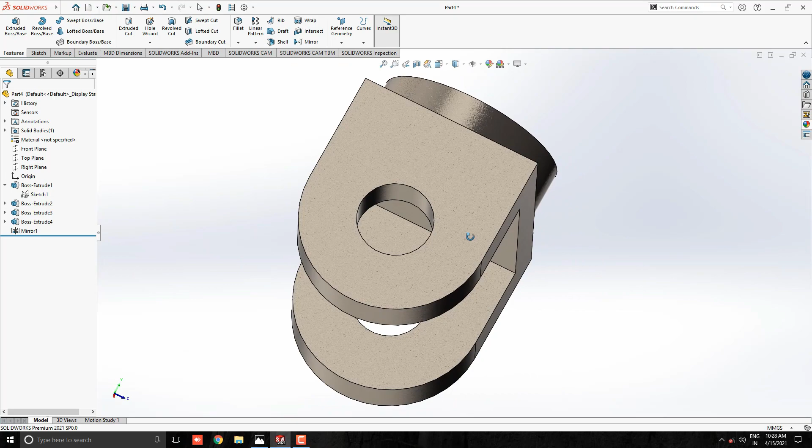This is the SolidWorks 3D modeling exercise number 30. We make this 3D model in minimum and simple steps. Let's start. Start the part drawing.

We will make a 3D model with the help of this diagram. At the start, we select the top plane for the sketch and draw a rectangular profile with all circles according to dimensions. Then extrude them one by one up to given dimensions. Next, we make this profile on the right side face and extrude it. Then mirror it for another solid. Our 3D model should be completed.

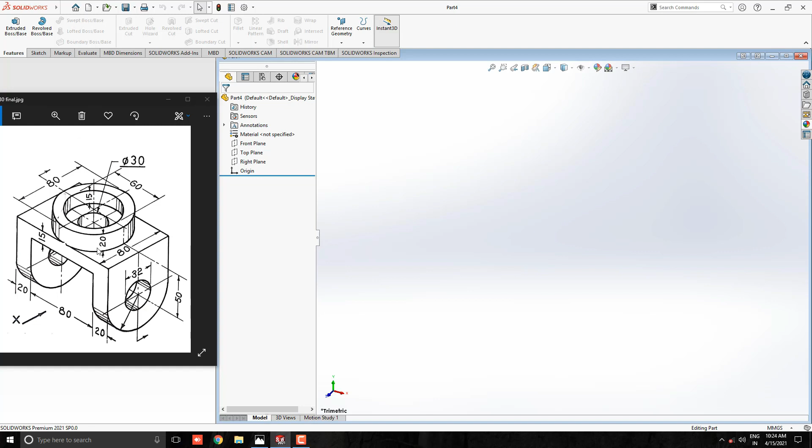Let's start modeling. Select the top plane for the sketch. Take a center rectangle tool. Start drawing with the origin point in this direction, like this. Enter the 80 mm width of the rectangle. If we calculate the total length, we got 120 mm length for the rectangle.

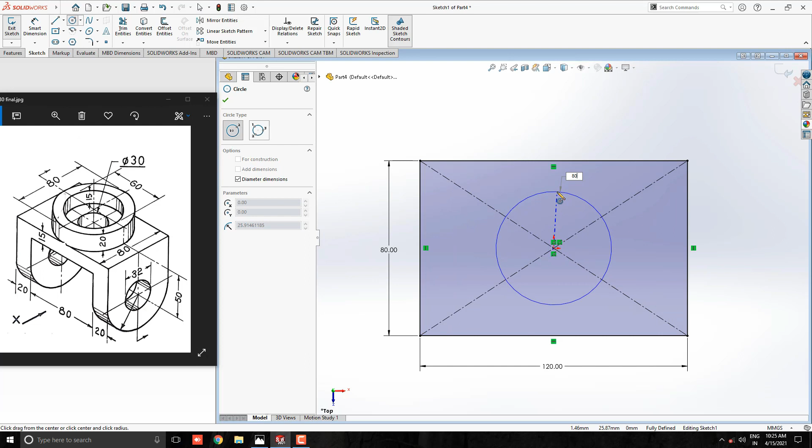Draw the circle of diameter 80 with the origin point. Draw this circle of diameter 30 with the same center point. Once draw the circle of diameter 60 with the same center point. We extrude them one by one as shown in the diagram.

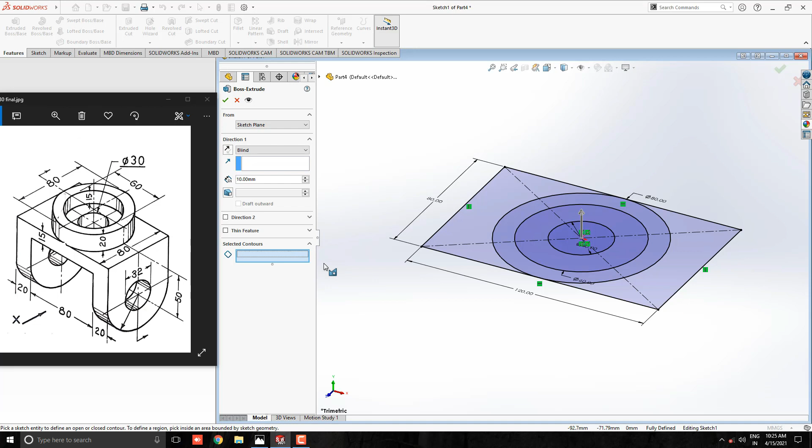Take Extrude tool from the Feature tab. Here multiple profiles are detected. Now we go with Select Contours. Select the smallest circle in the rectangle. Switch extrude direction and enter the extruding value 15 mm. See the preview and click on OK.

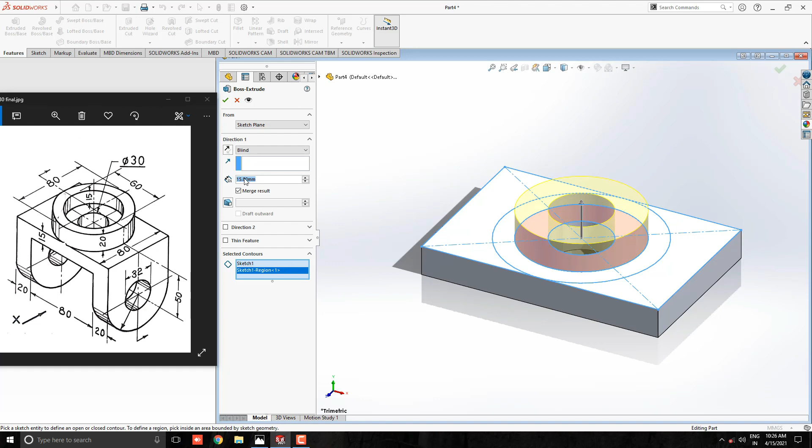Now we make this inside collar, which is 15 mm deep from the top face, and height is 20 mm. That means we have to extrude this collar up to 5 mm. Just expand the first extrude feature and select Sketch 1. Select Extruded Boss tool and select this middle circle profile for extruding. Make sure direction is set toward the upside. Enter the extruding value 5 mm. See the preview and click on OK.

Now we extrude this outer collar. Once select Sketch 1. Select Extruded Boss tool and select this outer circle profile for extruding. Make sure direction is set toward the upside. Enter the extruding value of 20 mm. See, our first step is completed.

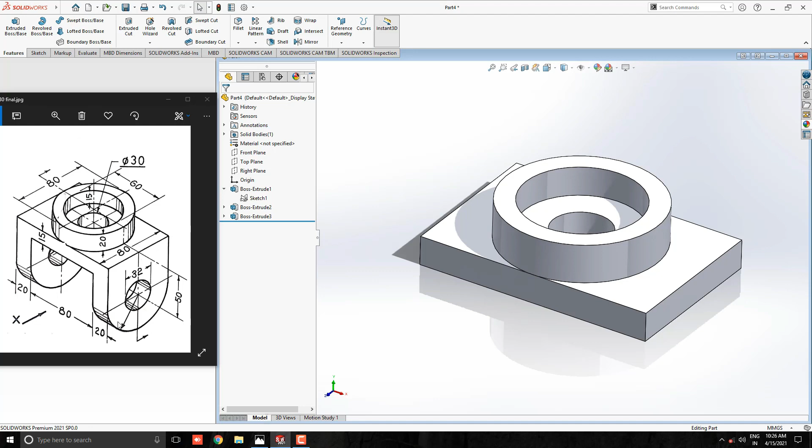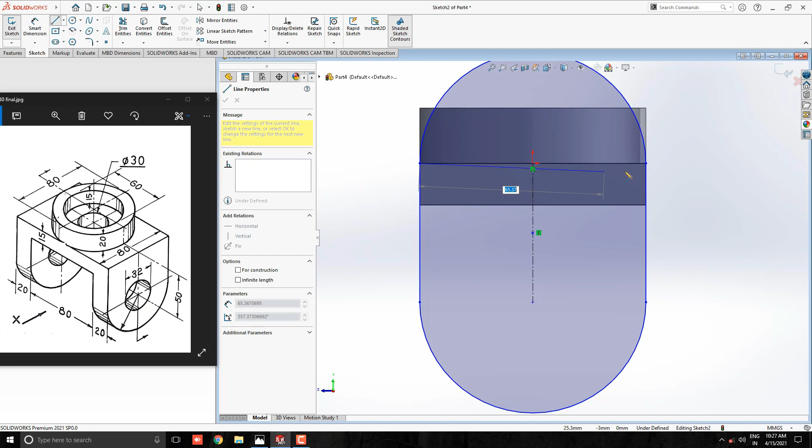Now we make this profile. Select this face for the sketch. Select the Straight Slot tool and start to draw from the midpoint of this edge to the downside. Enter 50 mm length of the slot and 80 mm width of the slot. Take Line tool. Join these two endpoints of the arc. Draw the circle of diameter 32 with the center of the bottom arc.

Take Extrude tool from the Feature tab. Here multiple profiles are detected. Now we select this bottom side of the sketch. Here we need to switch extrude direction. Enter the extruding value of 20 mm. See the preview and click on OK.

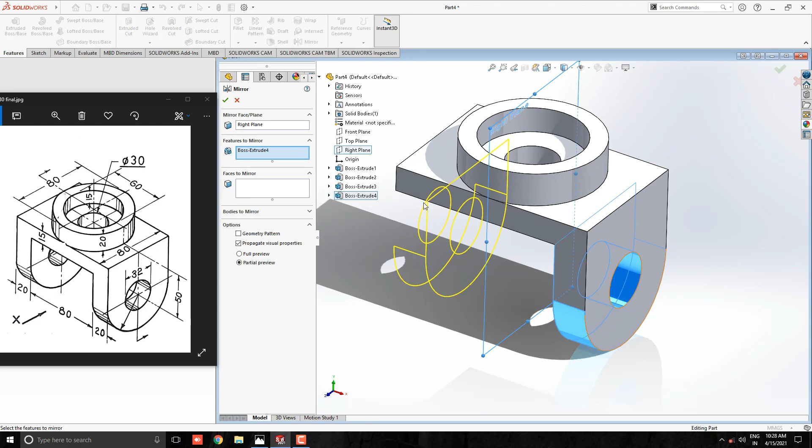Now we mirror this solid for another side. Select last Extrude feature. Select Mirror tool from the Feature tab. Here we require one plane for the mirror axis. Drop down the part history and select the right plane. See the preview and click on OK. Our 3D model is completed. Apply any appearance for this model, as you like or as per your requirement.